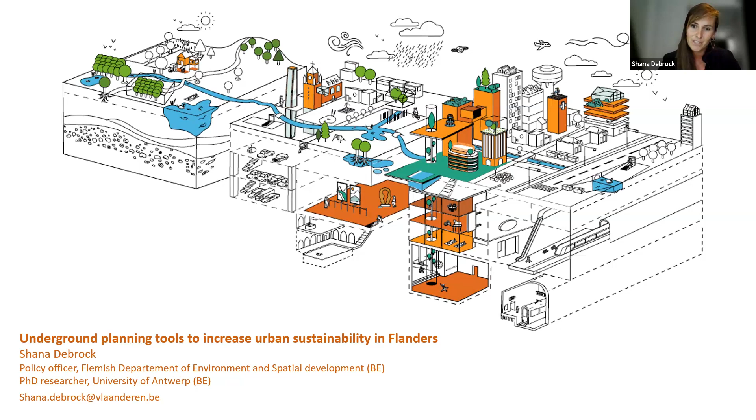Good afternoon, I'm Shana Debrock, and I would like to talk about the efforts we're making in Flanders concerning underground planning tools to increase urban sustainability. But first, let me provide you with some urban planning context.

So Flanders faces many challenges. 33% of the surface is considered settlement area and 14% of its surface is effective soil sealed area. This is amongst the highest in Europe. And also every day, an average of 6 hectares a day of land take is taking place.

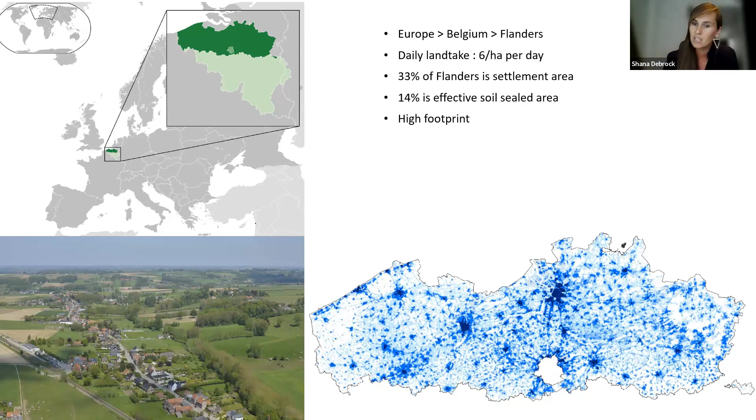This leads to, amongst other things, heat stress, flooding, and puts a lot of pressure on open space. That's why Flemish planning policy intends to bring urban sprawl to a standstill by lowering our daily land take from 6 today to 0 hectares by 2040. We're doing that by applying densification development strategies and focusing on nodal development.

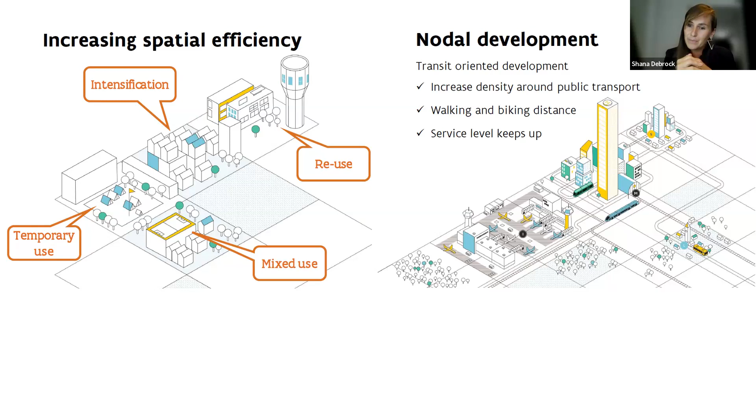However, we have seen that the subsurface is missing in this whole story. So in order to bridge the gap between surface and subsurface policy, we instigated a policy exploration to examine if efficient use of the urban underground space could be a viable solution for lowering our daily land take and fulfilling our Flemish policy objectives on spatial efficiency.

So how do we define urban underground space? Because there are lots and lots of definitions. We define it as man-made built underground spaces for people to wander, to reside, amongst other things, and they can be used for a very broad range of functions. So we mean to look beyond utilities, technical facilities, and storage, and so on.

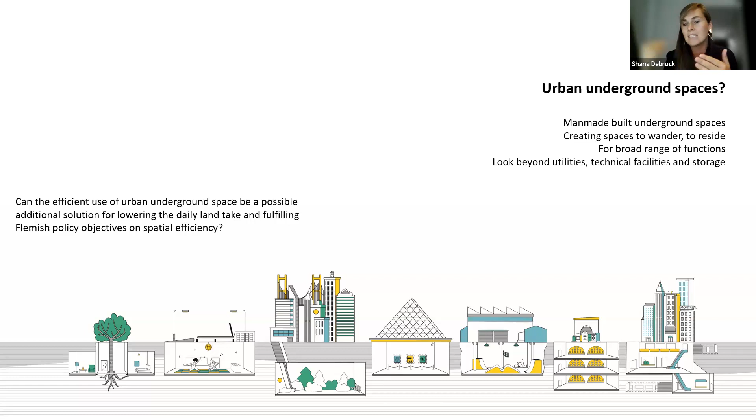However, today we see that the subsurface, and this is a trend that's going on worldwide, not just in Flanders, is often characterized by great diversity in technical functions, but also increasing claims, conflicting functions, and competition. So underground developments are planned in an ad hoc, last resort, first come first serve practice, and sectors seem to be working side by side without regard for common interest. All this is coupled with a lack of knowledge about the location of existing underground structures. You can imagine it leads to a whole bunch of calamities.

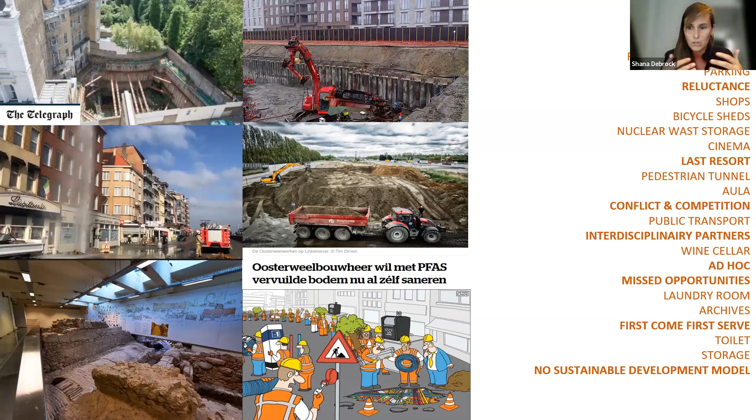So there's this certain form of chaos and disorder due to the various space claims that are dealt with without an integrating framework, and this leads to missed opportunities and often financial hangovers.

However, we do see that the underground urban space holds several benefits for Flanders. It can contribute to sustainable development goals, to societal and environmental challenges. It can increase urban densities, provide sustainable synergies, enhance quality of life, improve territorial identity, and serve as an economic catalyst.

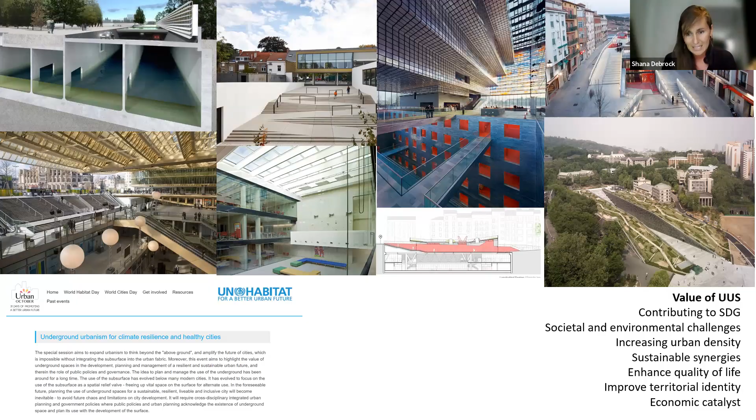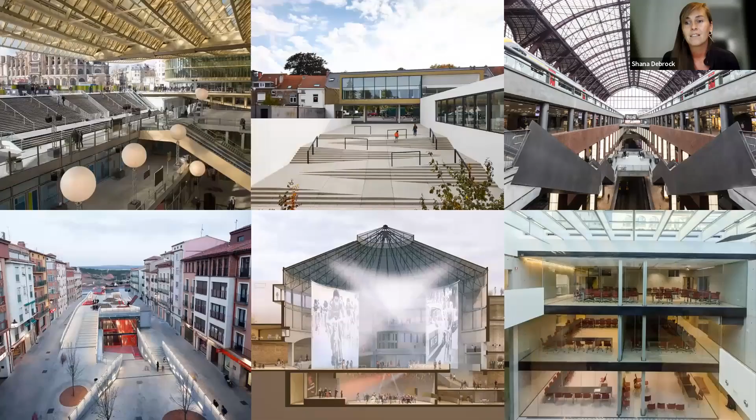And while places that do take advantage of the subsurface can actually look like this, you can see that we still have a lot of work cut out for us in the transition to sustainable underground spaces in Flanders.

But in order to do so, we need to understand the relationship between sustainability and urban underground space, which is a very complex one. Different researchers and policymakers hold different points of view on this relationship. But to put it bluntly, we see a very strong relationship between sustainable cities and the underground as a system of services, with underground space use as one of those services.

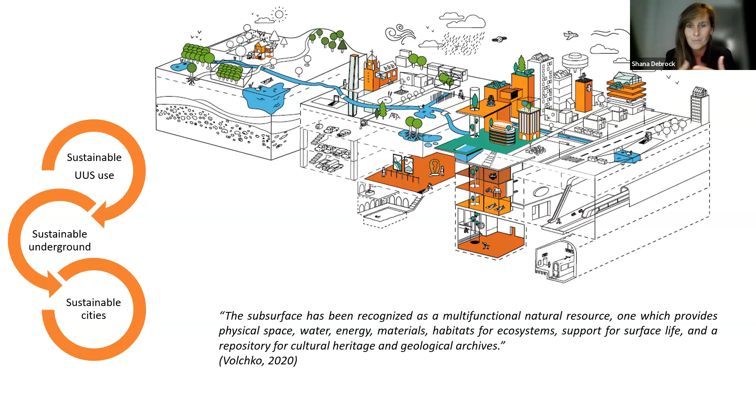We recognize the fact that urban underground space can only contribute to sustainable cities if the subsurface is dealt with in a holistic manner, where all the interactions between the different services are recognized, and the usage of one of those services is also done in a sustainable manner. So if you're going to work in the subsurface and create spaces, it also needs to be done in a sustainable manner.

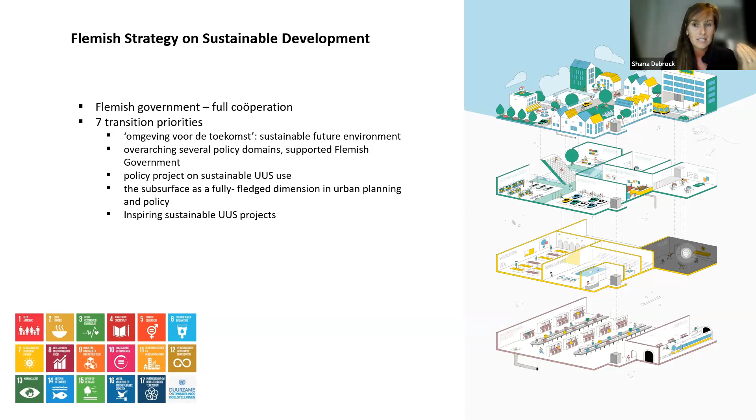Recently the Flemish government in its entirety has issued a new project, the Flemish Strategy on Sustainable Development. It's an overarching policy project that engages the entire Flemish government and administration. This strategy holds 7 transition priorities, focused on this transition to a more sustainable future. One of these priorities has a project that focuses on sustainable urban underground spaces, which is a project that I'm leading, and it holds several tools.

The first one, and actually I believe one of the most important ones, is that everything depends on the availability of data on the subsurface. Flanders already has an excellent database and knowledge center that gathers and displays data on the subsurface. But from an urban planning point of view, we're most interested in how we can use that raw geological data for planning, executing, or designing these underground structures. We realize there's a great need for translation of this geological data to information for urban planners and designers. Turns out, most of the time, we barely understand each other, geologists versus urban planners.

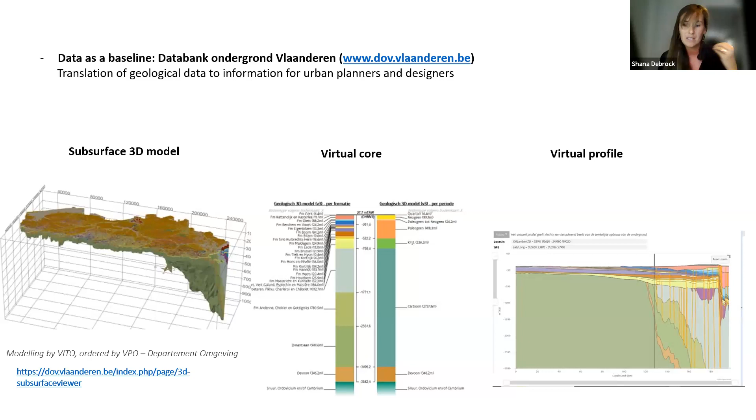So currently, our DOV, that's a database, holds several interesting tools, such as the Subsurface 3D Model, a tool that allows you to virtually drill in the subsurface and receive the geological information. You can also draw a virtual profile. In addition, we created a voxel model of Antwerp, and this viewer enables geological, hydrogeological, geotechnical prospection and inclusion of subsurface data in geothermal projects, and also in temporary dewatering, reuse of excavated soil, stability studies, and so on.

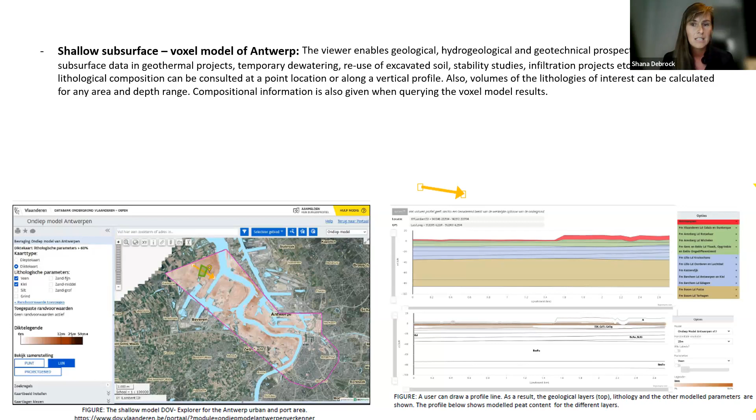Another interesting tool is the opportunity maps. This is work in progress, not done yet. Urban planners, geologists, geographers, and policymakers in Flanders are all working together to develop a framework on the different surface and subsurface parameters to consider when promoting urban underground space. These parameters include spatial context, settlement risk, raw material potential, geological potential, and risk. All these different dimensions are combined in a map and converted, aiming to give straightforward information on the potential of using urban underground space in different areas in Flanders.

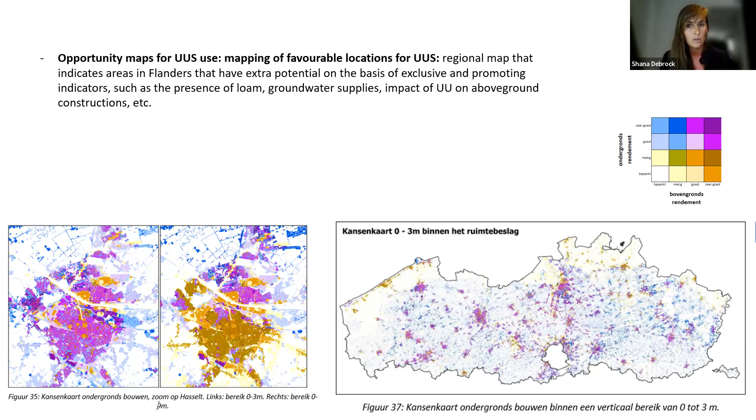We're also working on a planning framework for sustainable urban underground space use. These are considerations when using the subsurface. Like I just said, the subsurface is a system of different services, so this is how we're planning to grasp the interrelations and synergies between these services. This is a very difficult one. We're not yet far on it, but this is our plan.

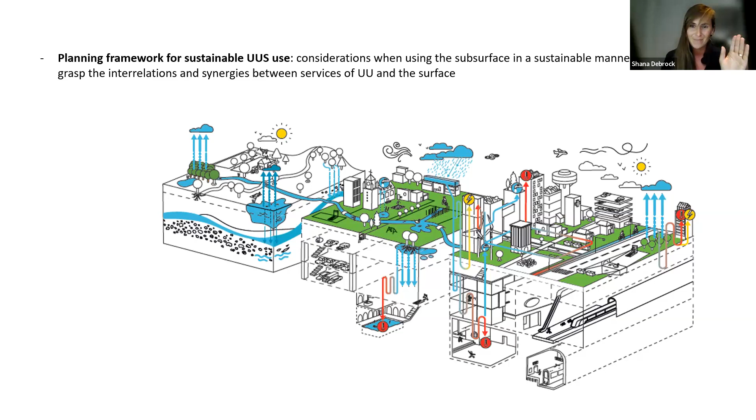Also last year, we finalized a research by design project, which involved several local authorities in the Netherlands and Flanders, design agencies, a university, and a knowledge center. The study, which we published, is called Designing from the Cross-Section: the Subsurface as a Building Block for the Future-Proof City. The aim of the design study was to research and redesign strategic urban locations where social challenges required redevelopment of this place.

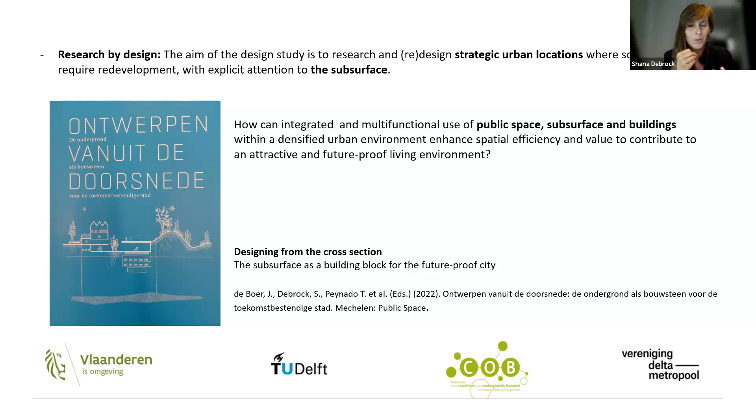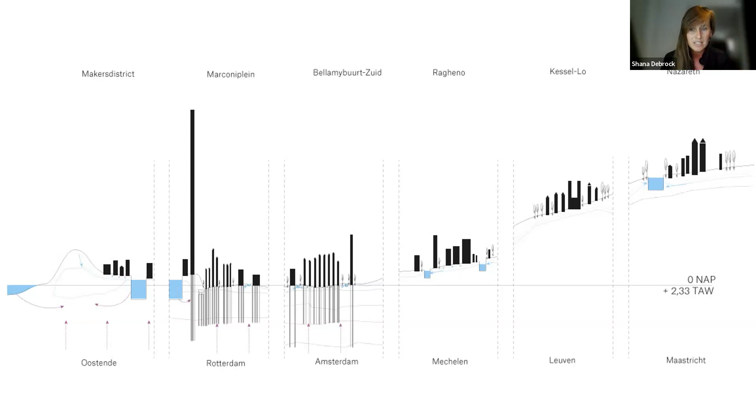But we had to make sure that they paid explicit attention to the subsurface. So local authorities were asked to come forward with possible case studies, and each case study was provided with a professional design team and a student design team from the Technical University of Delft. During this design study, significant importance, like I already mentioned, was attached to the subsurface.

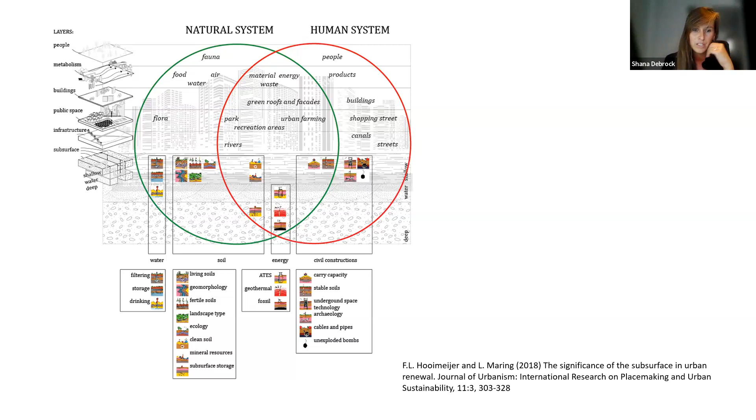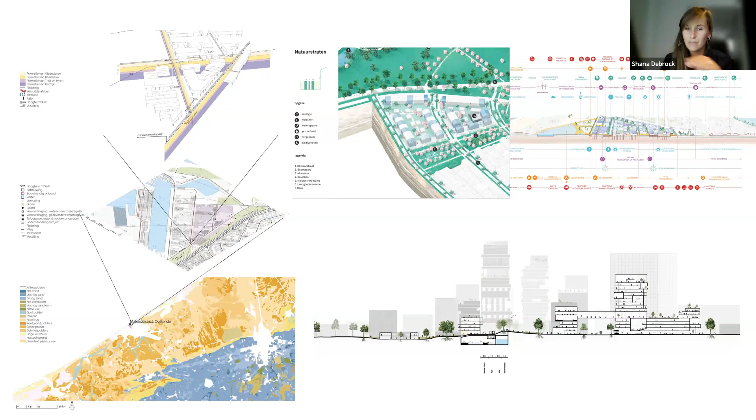Okay, then on to the next tool. We also developed a design toolbox for sustainable urban underground spaces, based on recent research on design recommendations for sustainable urban underground spaces.

This paper has just recently been published, last month I think. And these are actually recommendations that were synthesized in an integrative and holistic manner. So we took elements from other disciplines into account and reinterpreted them from an urban design point of view.

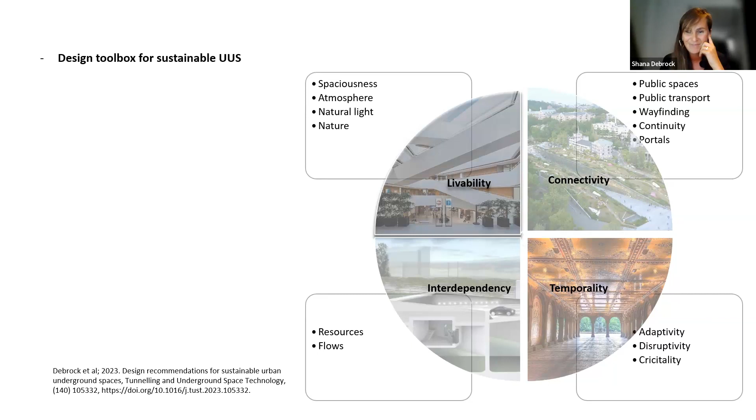So these findings suggested design recommendations on livability, connectivity, temporality, and interdependency, each with their own set of recommendations. Each sub-recommendation is also attached to a good practice in which it was done in a proper way. More information can be found in the paper.

Also, finally, we're still developing a policy guide for urban underground planning, aimed at local authorities and early adopters. This includes most of the previously mentioned tools, and we wanted to offer a practical way in which cities can plan their subsurface.

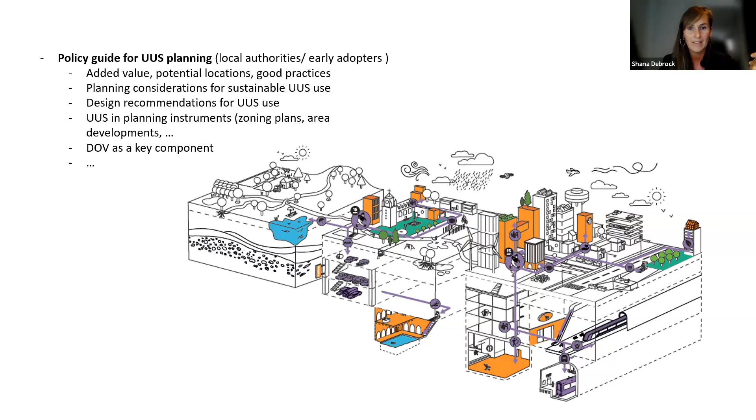So finally, we've arrived at our end game. What we're trying to do is develop a coherent, scientifically sound planning policy for sustainable urban underground space use. We're even trying to make a smooth transition to 3D planning, where we also take account of the use of our airspace—not outer space, but our roofs—and the impacts of drones and sky bridges.

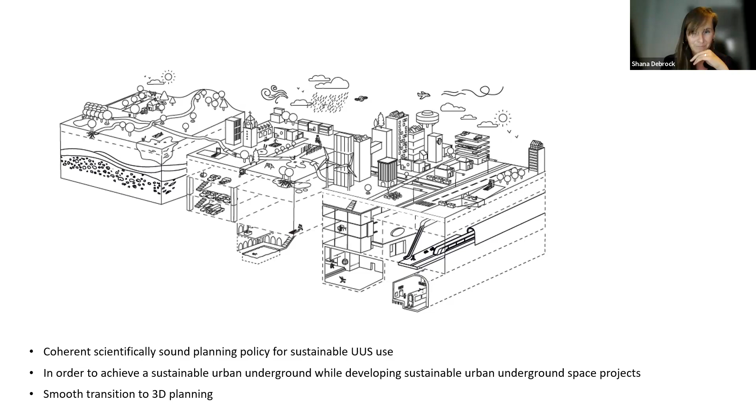So thank you very much. I hope you found this an interesting presentation on what we're trying to do in Flanders to achieve sustainable urban underground space use.

Awesome. Thank you very much, Shana Debrock, for that very fascinating and insightful presentation. I must really say that's a very audacious project there. And one of the key things I've taken from that is the design toolbox—as simple as it is, highlighting four key components that would serve as filters: livability, connectivity, interdependency, and temporality. I'm sure a lot of cities will benefit greatly from this particular work that you have done. Thank you very much for that.

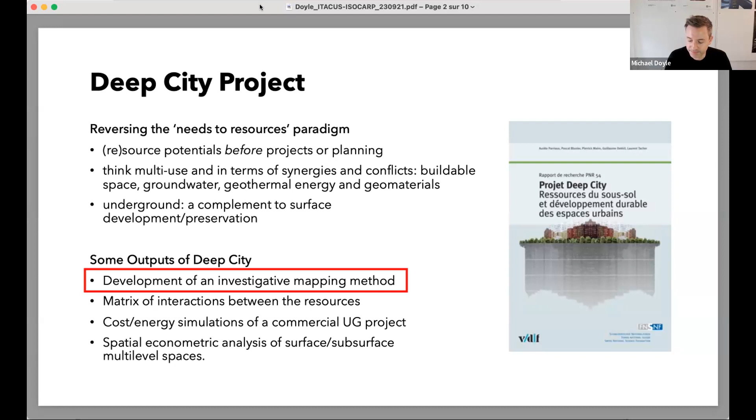And also, what I want to talk about today, which I focused on significantly in my PhD, was the development of an investigative mapping method. The idea was not that we'd take a large urban area and say, here's what you need to do with your underground — with planning there are many things that are extremely complex, and we wouldn't presume to master all of those things.

But what we wanted to do was find a way to summarize and get on the table for an eventual planning setting some of the opportunities and risks that could present themselves when looking at the types and qualities of the ground material, its potential for geothermal energy.

Where there is groundwater, and whether that groundwater tends to be used for drinking water, if it tends to also be a source of potential flooding during rainy seasons — which was the case here in Dakar — and then also built space.

When we look at the potential of built space, the position we took was to look at ground that was relatively stable, not necessarily ground that is easy to excavate and would require significant construction to stabilize. I understand that's a decision that can be made about how you approach the buildability of the ground.

We typically did this in collaboration with local actors, planners, geologists, and tried to get an understanding from the tacit knowledge people had locally about how you could work with certain geomaterials and what the challenges were related to those.

We also added something I brought to the table as someone trained in architecture and urban planning. The project hadn't looked at all at the actual characteristics of the urban surface morphology, and I wanted to bring that in as an extra point, because what we realized, particularly looking at Dakar, was that the potential for densification often tends to be in places that are already relatively central, because they afford easy connectivity.

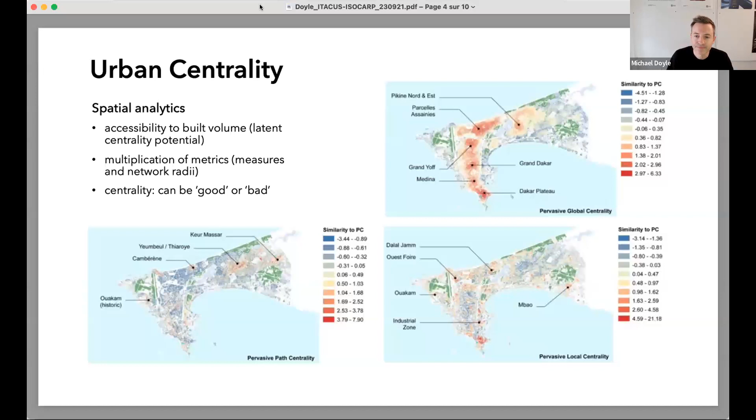There are questions that need to be raised, and maybe an interdisciplinary team needs to be composed to investigate what the risks and advantages are in a particular area. So it's more like zones where what's at stake is different, and the stakes here are being combined. The disadvantage of combining all of that is that nuances start to disappear. We can't work with many layers of data.

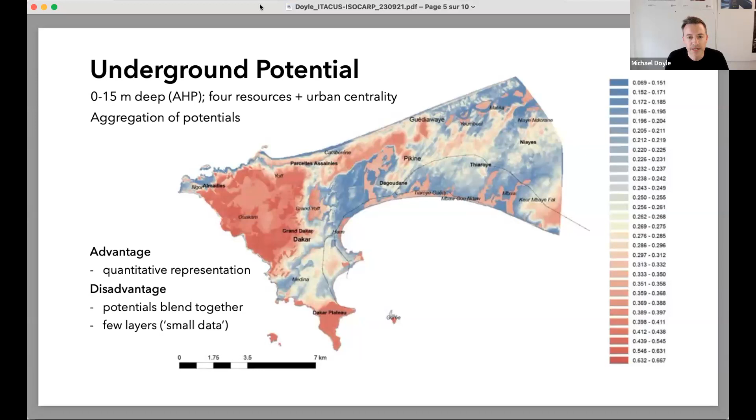There's a lot of summarizing, a lot of dimensionality reduction required, so I saw this as a small data scenario. That pushed me, in a postdoc I picked up after my dissertation, to use machine learning and artificial intelligence to try to index ground potentials using a large quantity of data characterizing the underground. This is a test I did for the city of the canton of Geneva in Switzerland.

The idea was that we'd let the self-organizing model propose to us areas of multiple resource combinations, in an order of similarity. From red to blue is most different to most similar. What you see with the traces of the nodes is a neural network, a one-dimensional neural network connecting typical cases and putting them in order of similarity. You could follow this line around and say, from the water areas to the highly bedrock mountainous areas, there are things going on that the algorithm is telling us we could investigate and find out more about.

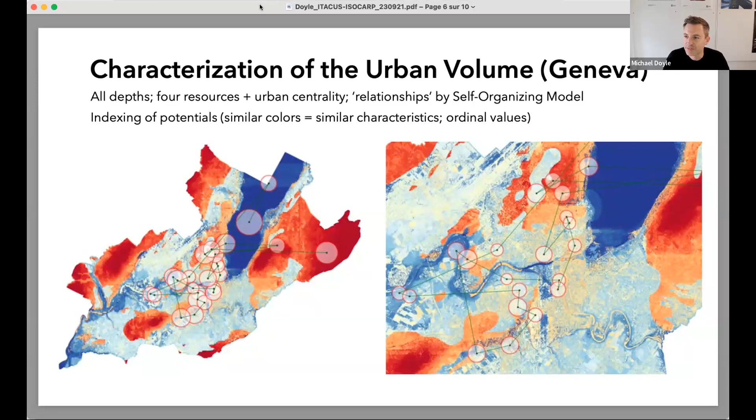The postdoc was a relatively short exercise, and career-wise I had to put that aside once I got a professor position here in Canada. But I'm now launching a new project which allows me to come back to some of the things I was working on with Deep City, and also with machine learning, as I personally get better at programming and understanding how these things work.

So this project, which I've called Masks of the Genius Loci, a prototype for an instrument for deciphering street identity with big data and machine learning algorithms, is looking at how to capture the singularity of an urban street. What makes one street different or similar to all other streets? The street becomes a common denominator. The objective is to build a prototype computational instrument that helps us see what makes one street not like every other street. That's how we're thinking of identity.

Hopefully, as far as I've been able to find, this kind of work will be unique in incorporating geological and hydrogeological data, which we have pretty good availability of in the province of Quebec, but I'd like to eventually expand this beyond just Quebec. That will depend on the kind of data and how it's represented in other contexts.

So just to give an idea of how we will combine this type of data together: when I say AI, I mean machine learning algorithms, specifically the self-organizing map, and high dimensional data sets—datasets with lots of characteristics and features that we layer on top of each other, making it impractical for an individual human being to sort out. So we let the machine or algorithms sort that out for us, and then we investigate what it's learned.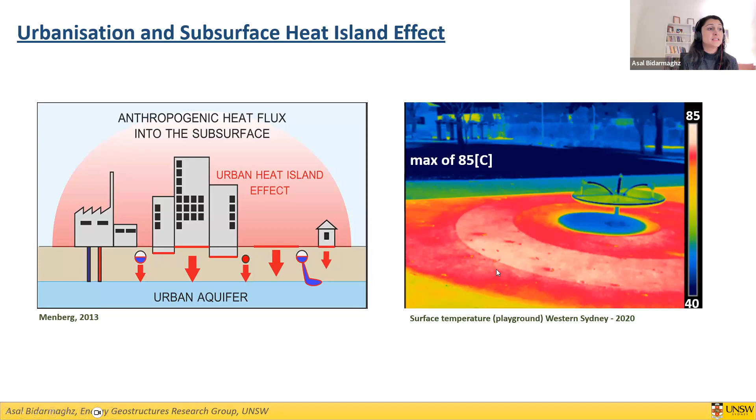My talk is about how we can use underground space and structures and energy resources in a sustainable and resilient manner, very much aligned with what we already heard from Shana and Michael, but slightly different from the engineering point of view. When we talk about urban heat island effect, most of you are familiar with that concept - we feel it as higher temperatures in the cities, also very high temperatures at the surface. On the right hand side is the surface of a playground in the west side of Sydney that reached 85 degrees Celsius in summertime.

However, most of the time we ignore what is happening in the urban subsurface. Similar to climate change and the urban heat island effect above surface, a phenomenon we call underground climate change is also happening in the shallow subsurface. Some evidence includes the London Tube, where some stations experience temperatures as high as 42 degrees C. Even here in Sydney, we have measured soil temperatures of 38 degrees C more than 25 meters below ground level. So it's very difficult, basically impossible, to ignore what is happening underground.

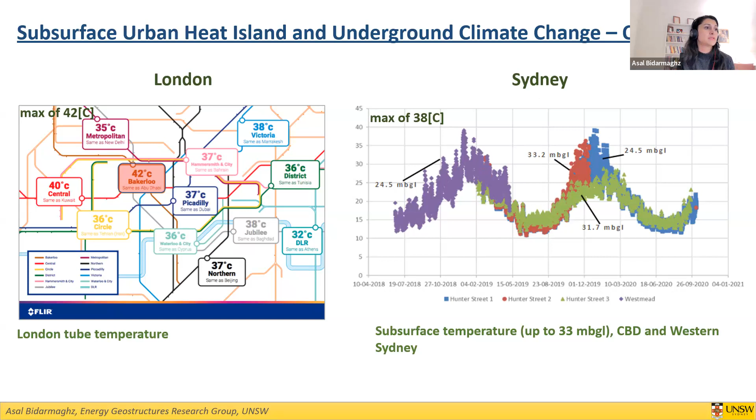Why is this happening? A big part of it is because of increased human activities in the urban underground, anthropogenic heat fluxes, like the large number of tunnels, constructions, and developments we are doing underground. In Sydney, for example, we have kilometers of tunnels to be constructed over the next 20 years, and multi-level car parks, basements, high voltage cables, and more.

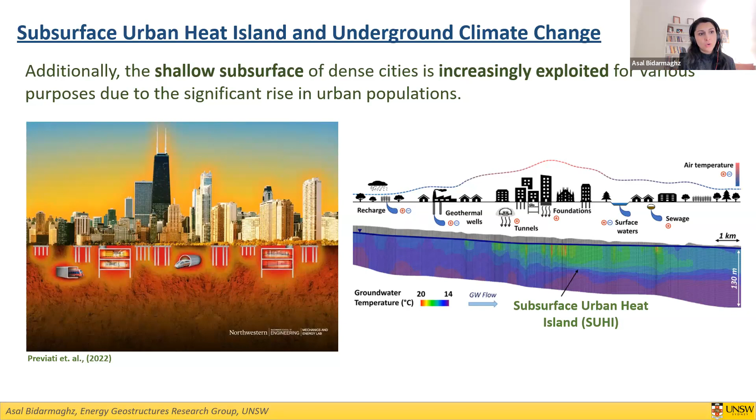Another factor is the exchange of heat between the above surface and underground. This follows the rules of physics, there's no way we can stop it. Depending on the temperature difference, heat will be exchanged between above and underground. This is what we call subsurface urban heat island. It's a rather new topic, with a limited number of researchers around the world working on it, but it's getting more attention day by day, causing what we call urban underground climate change.

So what this means is that most major cities, or densely populated cities, are suffering from a significantly warmer than normal subsurface. When I talk about subsurface, I'm talking about a maximum of 100 meters below surface, or even 50.

What are the impacts? These impact the subsurface sustainability and serviceability, and this contradicts the idea that we want to utilize the urban underground in a sustainable manner for the future generation. These high temperatures have a number of impacts that I've listed here.

It will affect above and underground structural instability, like tunnels, retaining walls, or piles. Any structural element will have its stability impacted due to these high temperatures.

Groundwater quality and quantity is affected. Groundwater temperature is one of the main things that has been measured in many cities around the world as an indication of underground climate change.

Underground ventilation and air conditioning inefficiency is another impact. If you've stepped into the London Tube, or similar systems in New York or Singapore, you can feel that heat in the underground space, on the platform, in the trains. This is because the soil surrounding those tunnels is significantly warmer than it's supposed to be, it's thermally saturated, and cannot absorb any more heat.

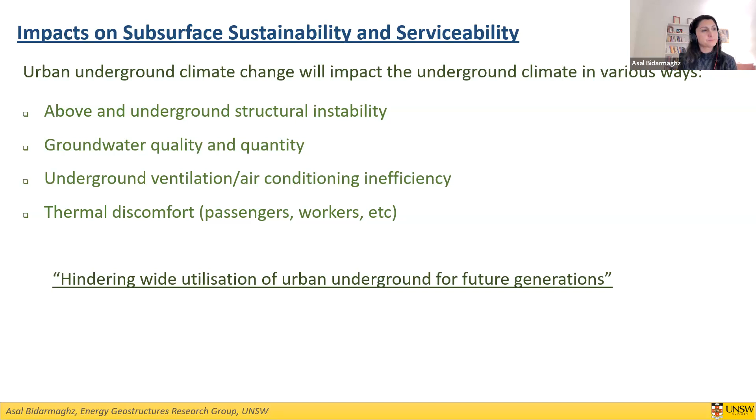So those were observations and measurements in the field. However, my research in the past few years has mainly focused on quantification of temperature increase in some areas.

For example, this one is in Kensington and Chelsea in London. Kensington and Chelsea is a densely populated borough with tens of thousands of residential basements and tens of kilometers of train lines underneath. So basements and train lines are main contributors to underground temperature increase.

What we observed through numerical modeling was that a maximum 5 to 8 degrees Celsius temperature increase was observed in part of the subsurface.

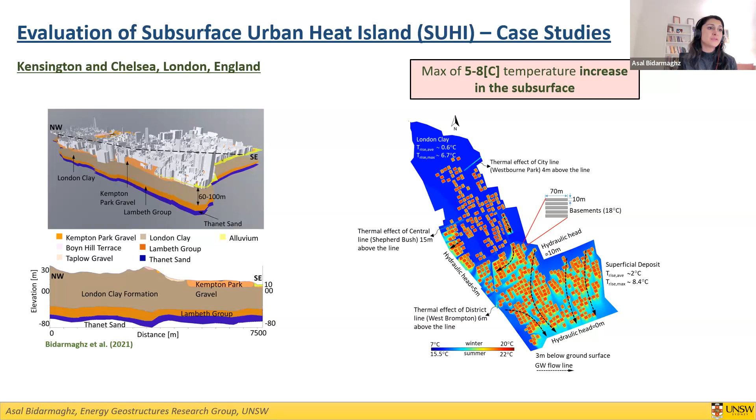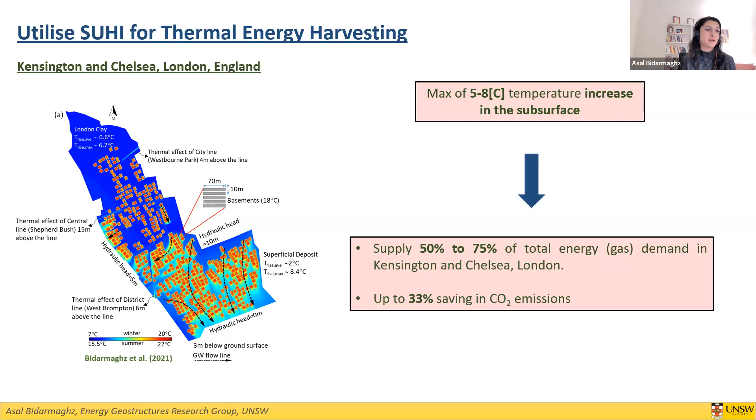If we take the volume average temperature increase in that borough, which has 12 kilometers square surface area, this could fulfill up to 75% of the total energy demand or gas demand of that borough. That could also translate into around 33% savings in CO2 emissions. So this heat exists right underneath us, and we can use it.

Another study I was involved with was the same research, but in Cardiff, Wales. Cardiff also has a large number of residential basements, not as busy as Kensington and Chelsea. What we observed was a maximum of 2 to 3 degrees C temperature increase in the subsurface.

If we translate that into thermal energy, up to 100%, depending on usage and household type, of the energy demand could be supplied, with up to 75% savings in CO2 emissions, as opposed to using electricity or fossil fuels.

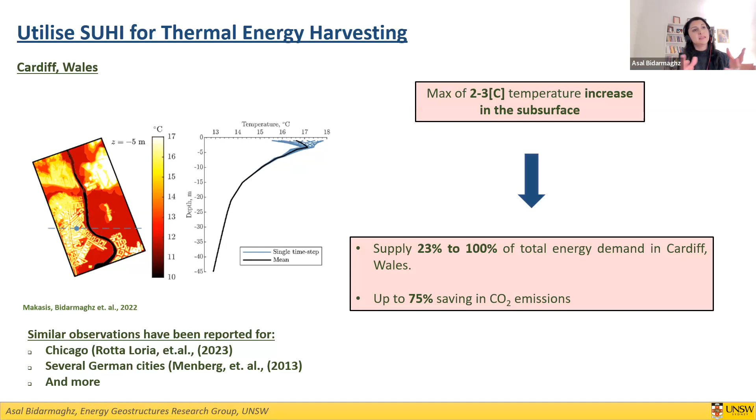There is similar research happening around the world, for example in the US, Chicago, several German cities, in Japan, and many more, that are quantifying the temperature increase in the subsurface and then translating it into geothermal potential. And we're talking about shallow geothermal energy.

So what can we potentially do? Because underground climate change exists in my view, but can we change it into opportunities? Yes, we can. We have a massive amount of heating energy. So with some planning, we can extract that heat and use it in wintertime. We can extract it from the shallow subsurface, transfer it to your building, and heat up your house. Once you do that, you will increase the capacity in the ground to also reject some heat. Which means that not only can you use it for heating, but you will also create capacity for cooling. So it is a heating and cooling potential.

Because if you continuously extract that heat, you're going to freeze the ground, and that's not what we want. If you continuously reject heat, you're going to make the ground very, very warm, and that's also not what we want. So it must be a balance, a perfect balance. We have to first take it out and then maintain that balance with heating and cooling.

So the most conventional way of exchanging heat between spaces above ground and the subsurface is borehole heat exchangers. These are essentially high density polyethylene pipes, closed loop with water circulating within, embedded in a borehole. In summertime they take heat from the building and reject it to the surrounding ground as it has a lower temperature, and in wintertime the process is vice versa.

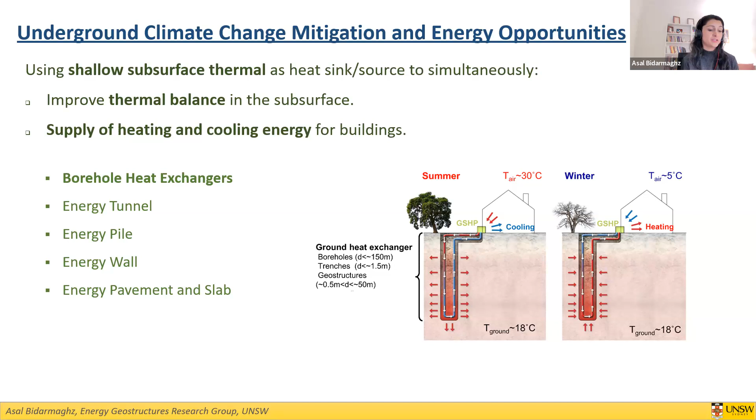For example, we can embed pipes in the lining of a tunnel to take heat not only from the tunnel area, which is actually elevated in temperature, but also from the surrounding soil, and then transfer it to the building above ground. Once we create that capacity, we can take heat from the building above ground and reject it to the ground in the hot season.

And also energy piles. Any high rise, any tall building requires piles regardless of the energy supply or not. So the installation, the drilling, everything is already there and has to be covered. So what if we actually add some pipes in there so we can exchange heat as well? It's a dual purpose thing, structural and thermal.

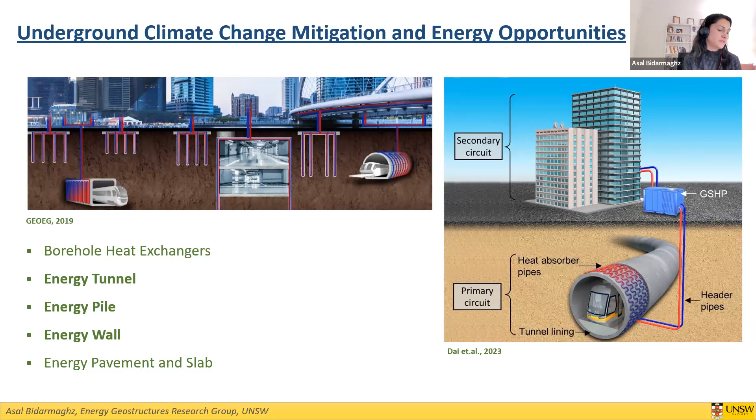This energy geostructures concept is also rather new in the world. We have some pilot projects, for example energy piles at the University of Melbourne, diaphragm walls in Vienna, and energy tunnels, just small segments, in Stuttgart. As you can see, these are the rebars for the energy piles, and the high density polyethylene pipes are cable tied to the rebars, with water circulating within, and then this is pushed into the ground.

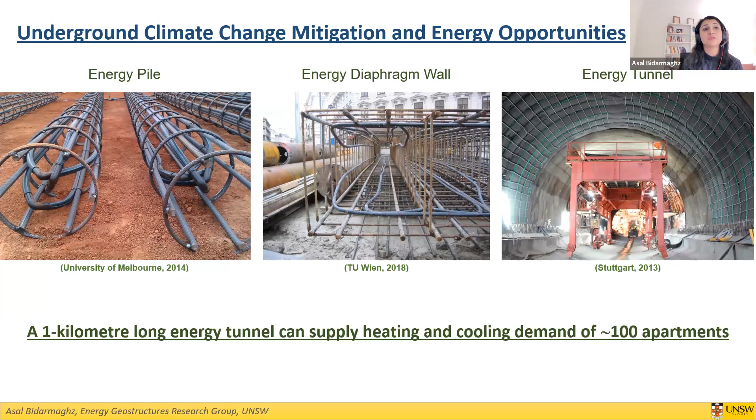So based on the research and estimations we've done, a kilometer long energy tunnel can supply the heating and cooling demand of around 100 apartments, if you're thinking of a typical household.

So if I want to put this in the context of New South Wales, Sydney, where I'm living and working, and talk about the benefits of this shallow subsurface energy, or what if we change underground climate change into opportunities in terms of energy: if we switch heating and cooling of a typical school in Sydney from electricity or fossil fuel to geothermal energy, that school will save around 110,000 Australian dollars per year. This can amount to savings of more than 600 tons of CO2 emissions per year for a typical school.

And we have around 3,000 plus schools in New South Wales. If we look into the climate related death rate, and if we switch all those schools to geothermal, we will have 400 fewer climate related deaths per year. And this is a massive number.

Other benefits I can point out is that you can have concurrent heating and cooling. You can actually heat up the pool once you are cooling down the gym next door. So the ground does have the capacity to provide heating and cooling concurrently if it is designed perfectly.

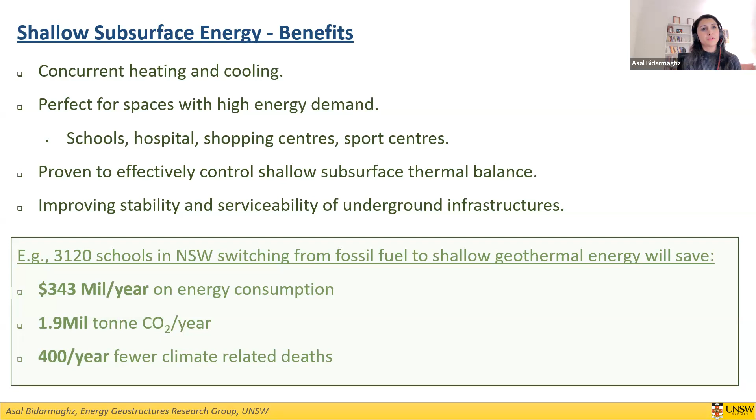Again, just to finish my talk, I want to highlight how much we will save if all schools in New South Wales switch to geothermal. We're talking about more than $340 million per year in energy consumption savings, around 2 million tons of CO2 emission savings per year, and also 400 or more fewer climate-related deaths if we switch to a sustainable, renewable source of energy that exists right underneath us. Thank you very much.

Awesome, thank you very much, Dr. Asal, for that very interesting presentation as well. I have been really impressed by the quality, and not just that, the different perspectives that we've addressed in our different presentations.

Obviously this has a different twist to the other two presentations, where this basically opened up an entire frontier on underground climate change, which is usually not a topic of discussion.

But the most important thing I've been able to draw from this are the opportunities you've highlighted, which require a little bit more thinking from decision makers, from professionals in different cities, as to the opportunities and benefits for our cities, not just from an environmental point of view, but from a social and economic perspective as well.

So thank you very much, Dr. Asal, for that presentation. And I know we're running out of time, but we have two questions, and those questions have come from Shana, and I presume these questions... I do have a question as well, and it's a general question.